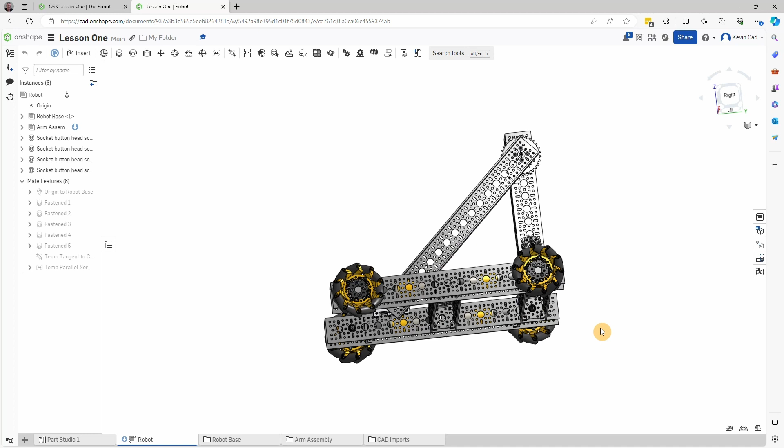Continuing on with our plan to finish off this robot, this video we're going to focus on assembling this arm mechanism. Normally when you're designing something, you've got an idea of where it is you're headed, played with some prototype parts, or have a whiteboard sketch. Here I'm just going to show you what the end result's going to be.

So we're going to build a new assembly, and it'll be separate from the base assembly. That's our plan. You can see we used a 10-hole high post. It's got a motor and it's got some sprockets and things.

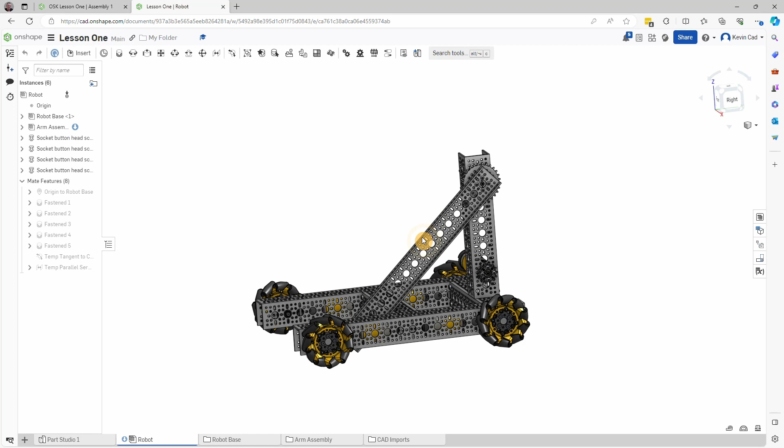So going back to our robot, we're going to start a new assembly. This is going to go way faster because a lot of this stuff you've already done. Our arm, in fact, we can actually look at just the arm assembly here. This is what it's going to look like.

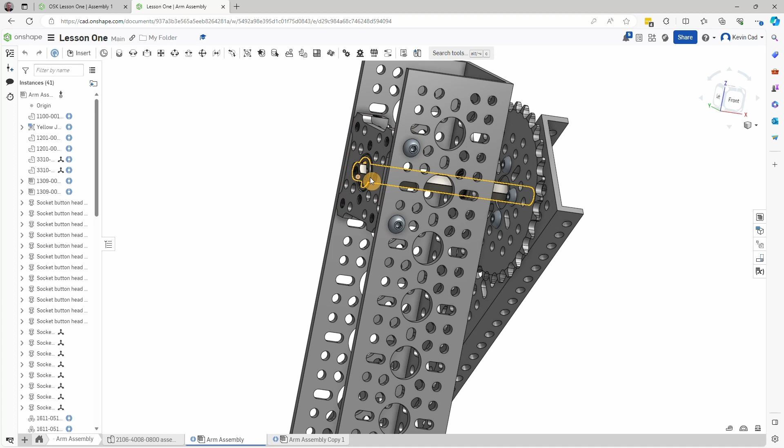We have a deep channel. We have a quad block. There's another quad block up here that's going to help support the end of this shaft here so that we can attach that to the robot arm. We're just going to make note of the fact that that quad block is going to be aligned with this second hole. There's a shaft that we're going to need to import, make the post, and the post consists of a quad block, a 10-hole goBILDA U channel, and another quad block.

Going back over here, we've started our new assembly, and I'm going to right-click, rename it Arm Assembly. We are going to import some parts, so we're going to insert them from our library. We're going to use the 10-hole one here, and we need a couple of quad blocks.

You are going to figure out the rest of that, and I'll leave this up here for a sec so that you can pause on it. A quad block at the bottom, see down there? Put that on, put the screws on. There's a quad block up here, and I'll leave it here while we pause for you to do this, and see if you can figure out how to get that to align like that. Go do that. Hopefully you ended up with something that looks a lot like this.

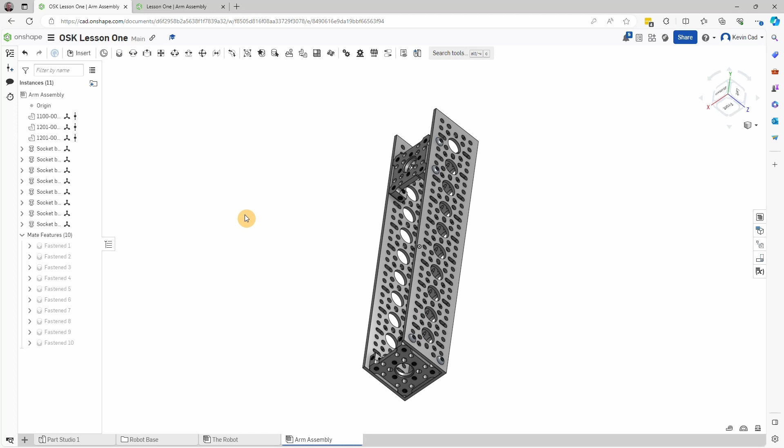Again, this is all stuff that we did in the previous videos. So the next thing that we're going to want to do is, if I look at that arm assembly, let's start with the motor down here. This is going to be very similar to something we've already done, so you're going to figure that out really quick. Couple little changes though.

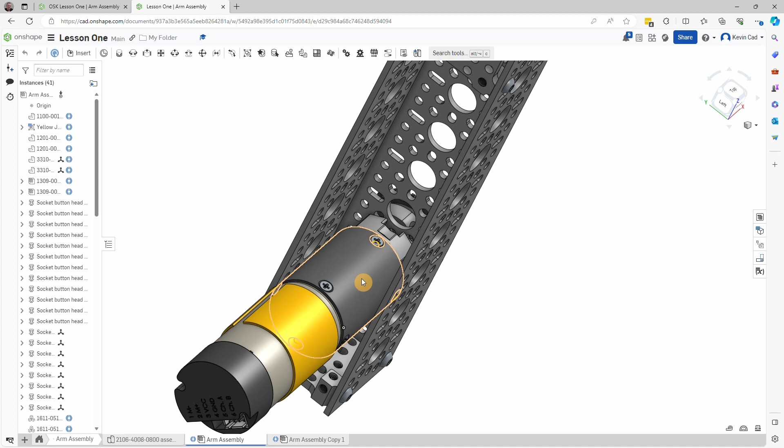This is a different motor than the one that we used before, and I wanted to take this opportunity to show you some models, including our Yellow Jacket model, actually has some configuration options. So we're going to insert from our library an assembly, and we're going to do a Yellow Jacket motor.

Now, before you click on that, take a look at this little spin down here, and you can see it has the ability to select gear ratios. And if I click down on this, there's a list of the gear ratios that goBILDA offers, and I'm actually going to select the 188:1 gear ratio, and that is the motor that I would like to insert.

So I'm going to click on this, and you can see that it's got a much bigger gear head on it. Configuration is adaptable later, so if I hover over my Yellow Jacket instance in the assembly, you can see the configuration options that were used to insert this one. I can right-click it and change configuration is an option here.

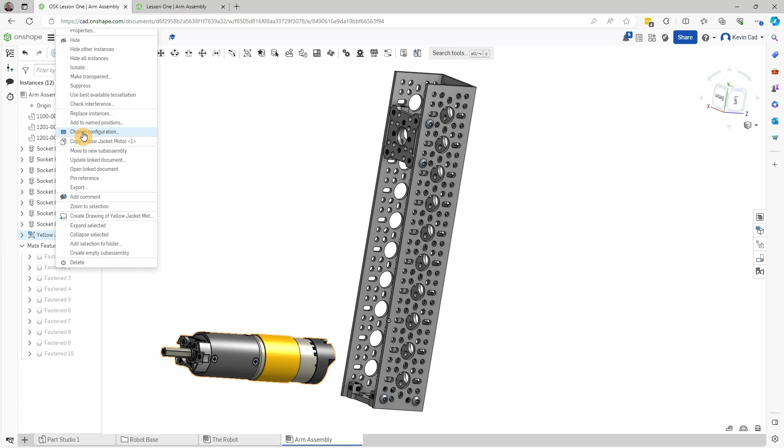And it turns out I can change the gear ratio. Let's take it all the way down to a 3:1. And you can see that the length of the gear head is changing based on the parameters that were set up in all of these things. At a later time I'm going to show you how you can do these as well for your own parts. For now, we'll put this guy back to 188:1 and leave it there.

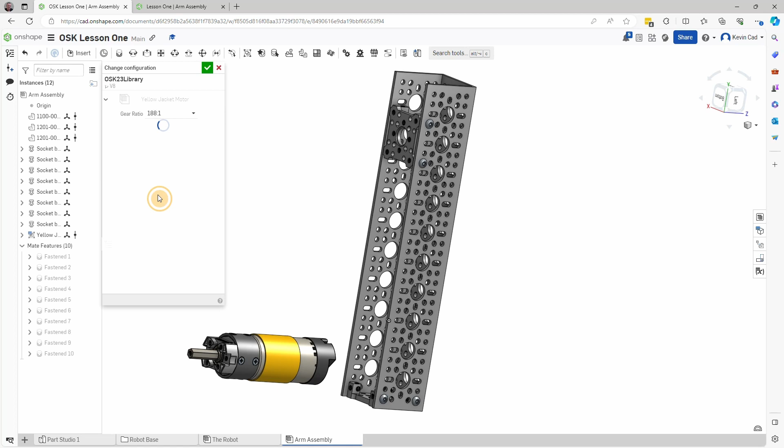You're going to mount this through the second hole here and put screws in. This is very similar to the first motor that we mounted. It's got the little oblong holes here, so you have to put the screws in and such.

You should have something that looks very similar to this. If you're having issues mounting that motor, it's almost the exact same steps that we used at the beginning of video number 2, where we mounted the motor to the quad block.

We now would like to add to that this sprocket assembly, which consists of a hub assembly that is in our library, and a sprocket, which is also in our library. Let's do a sub-assembly of this: insert new tab, create assembly. So we end up with assembly 1 here. I'm going to right click that and rename it to mounted sprocket.

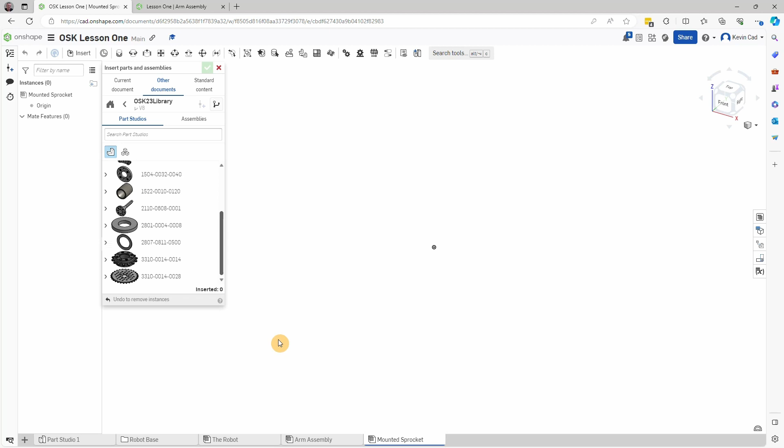From our OSK23 library, the sprocket, which is down near the bottom, there are 2 sprockets down there. Get the 3310-0014, the one that looks like that. And from assemblies, grab the hub up here on the top, the 1309, and we'll plop that down right there.

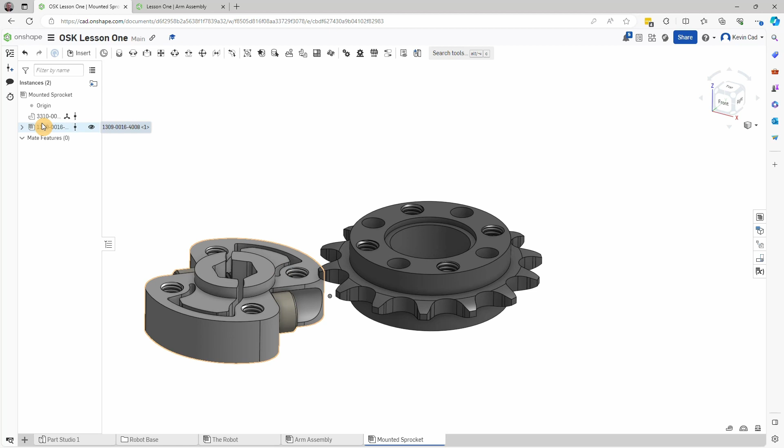As always, I take the first part that I inserted into an assembly, right click it, and fix it in place so that things move relative to it. Notice that the sprocket has through holes. Those are 4mm holes, and a 4mm screw will go right through it, and it has threads for a screw into that hole. Ideally, we would like to align these threaded holes up with a non-threaded hole on the other part.

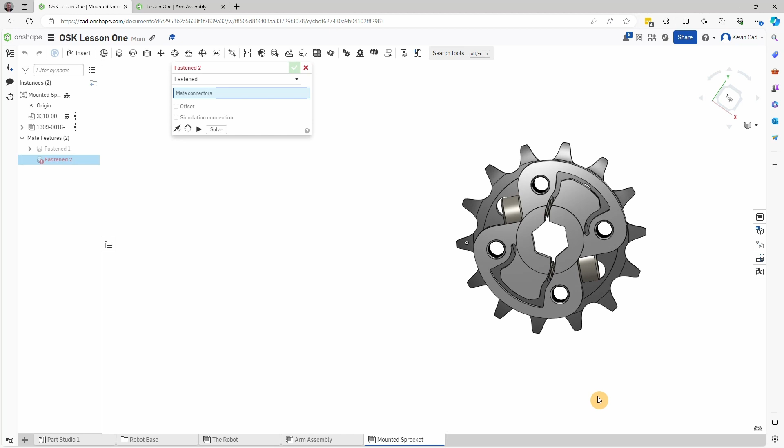My first inclination is to just try using a fastened mate between this part, clicking on this outside edge out here. I was able to use the geometry of the part to get the center there, and I can click on this and those should fasten themselves. It looks like everything lined up pretty good, except it turns out that the threaded holes, if I zoom in, you can see the threaded holes lined up and that isn't really what I wanted to do. There are a few things I could do to fix that.

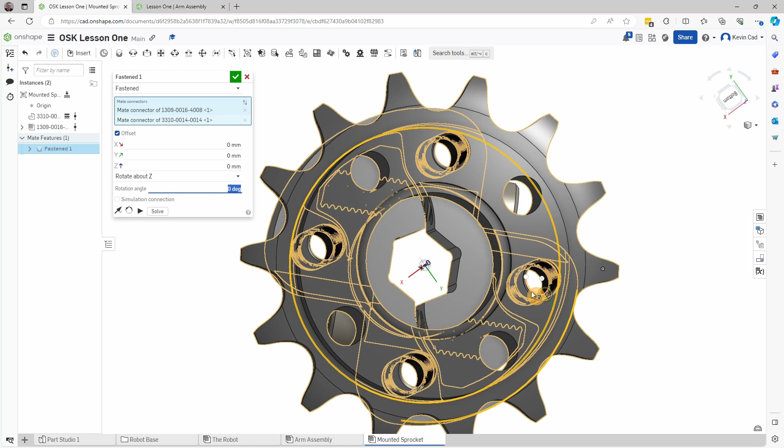One thing I could do is edit this and do an offset, rotating this fastened mate by some number of degrees around the z-axis. So I hit offset, click on rotate about z, and I need to enter the number of degrees. I kind of want to move 1/8 of a turn, so it turns out I need to rotate this thing about 45 degrees. Let me try that, 45 degrees. Okay, I've rotated that about 45 degrees, and now that hole pretty much aligns. Now I've got the proper alignment that I was looking for.

My goal in doing that was to show you that if you click this offset, you can do various things. You can rotate about various axes, one axis at a time. You can offset from the mate connector along the z-axis, or offset along the y-axis or the x-axis. So we just did a rotate there.

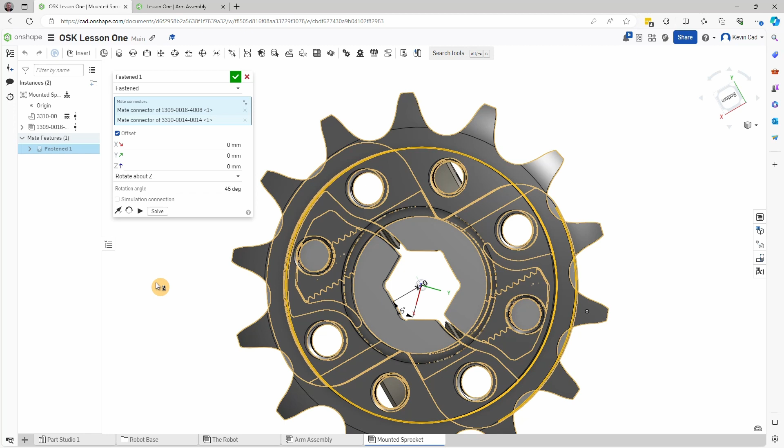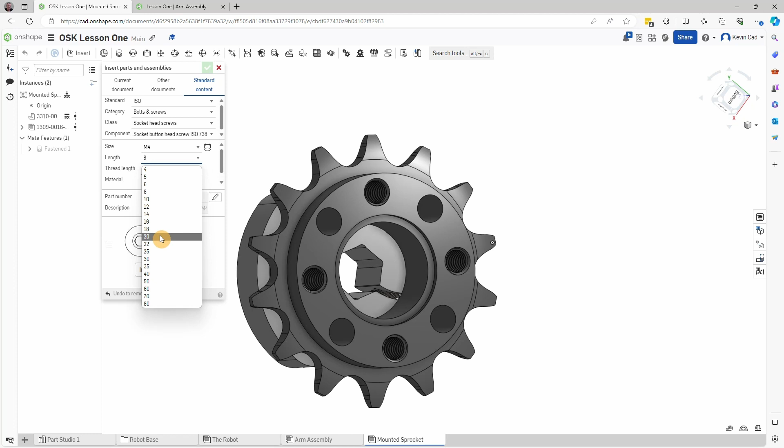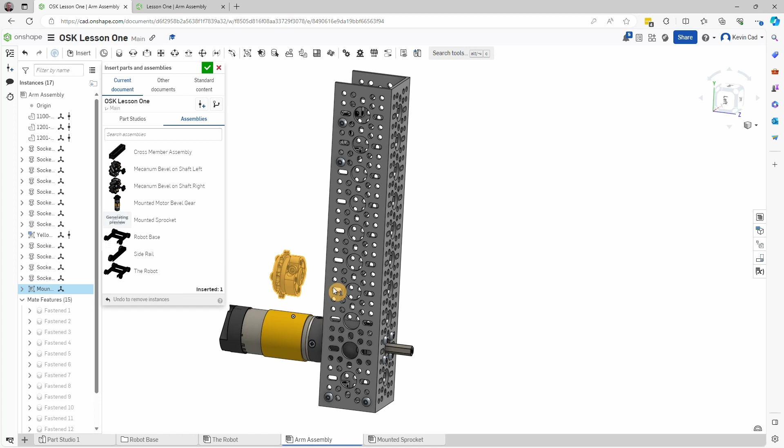I'm going to hide all my mate connectors, take a pause and go do that. So we now have that little gem, and we can go back to our Arm assembly, and insert from our current document a new assembly called mounted sprocket, and we'll throw that in here.

We'd like to mount it to this shaft here. I'd like the sprocket to be on this other side. I'm going to show you one more cool thing that you can do. This is one of those planned tangents.

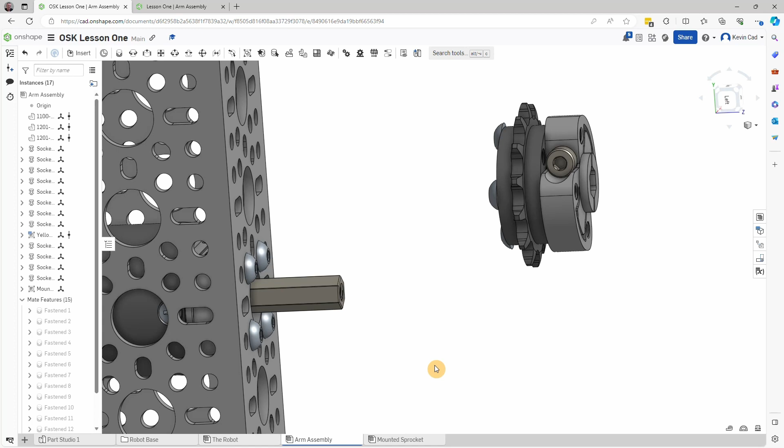If I click on this part, see this fancy handle that showed up here? This is for manipulating the orientation of a part or an assembly, and it has lots of things you can grab hold of.

These little squares here, if I grab one, I can drag the part around. This one with the arc on it allows me to rotate a part. I can grab that and rotate around one of the axes. I'm going to put that back to 0 so it's like nothing happened there.

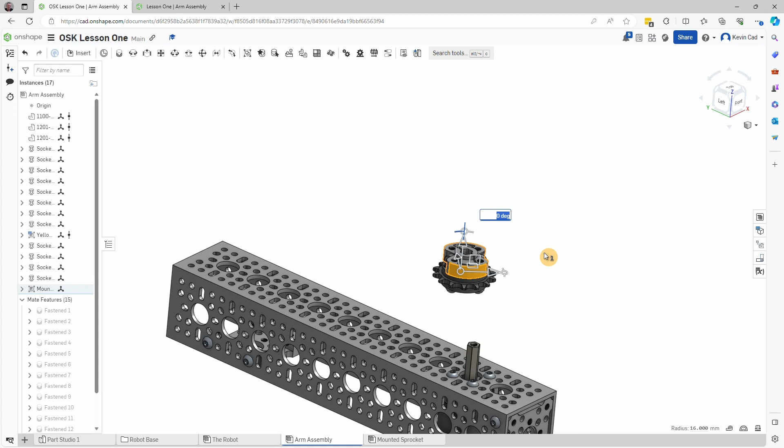I'm going to click on the left face. Now you can see if I rotate this around, what I really want to do is rotate it so it orients properly. Okay, I did it 180 degrees. There we go.

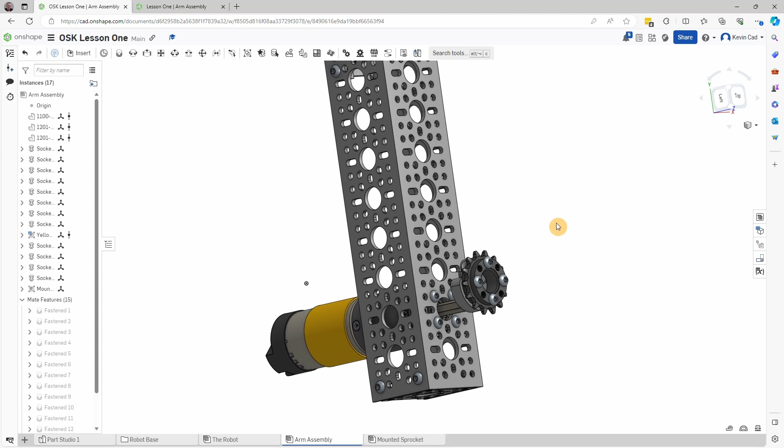So I would now like to somehow get this guy to mount on there, and I kind of want to mount it in that orientation. I also want it to rotate, so I could do a revolute mate. I'm going to slide this out of the way to the end of the shaft, so I got the mate connector at the end of the shaft and this. Okay, there we go.

Is this exactly what I want? No. Why? Well, remember the screws? We're going to conflict with the screws down here. It's really close to conflicting with them. I'm going to say that we're going to hit those screws. So let's think about this a little bit.

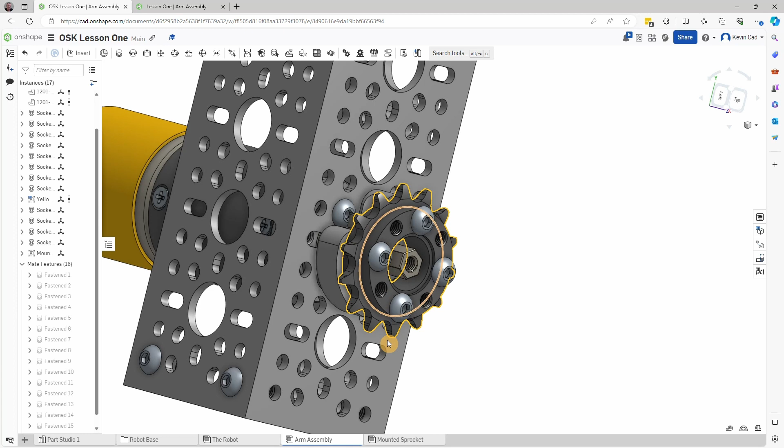Well, this part actually clamps onto this shaft, so that means it'll rotate, but I could also slide this thing right and left. And if you'll remember in our mating discussions before, a revolute will only rotate around the z-axis.

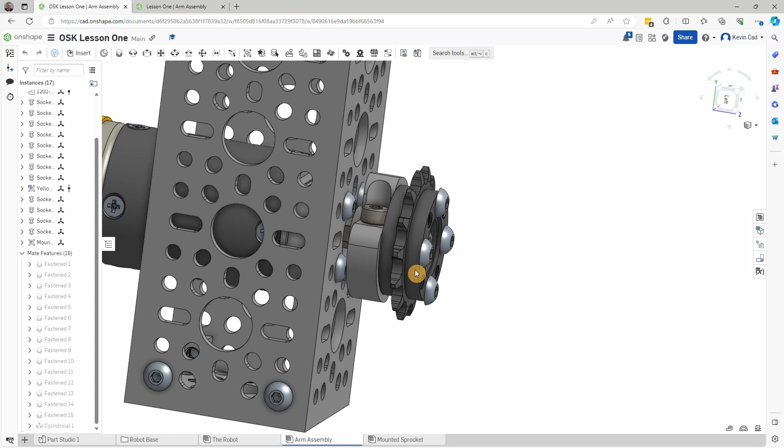There was another one called a cylindrical. There it is. That cylindrical mate, if I change it to a cylindrical, it'll rotate, but we can also slide it. Okay, so that's what I'm going to do for right now. I acknowledge that this part is a little bit loose at the moment, and we'll end up fixing it in a different way a little bit later. Okay, so there we go.

First step is let's go insert the bearings. So I'm going to go to other documents. There's our OSK library. These are composite parts, and the bearings are composite parts. So I'm going to click here and we're going to scroll down.

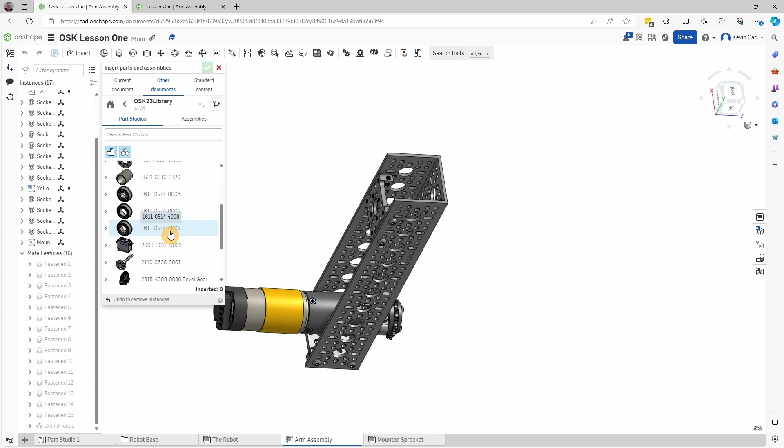Now, if you'll remember before, we used the first two bearings here and they end in 3 zeros and a 6, and those are smooth bore. It turns out there's another one here. It has a hex - this is a hex bore and it has a 4008 at the end. So we need 2 of those. Pop one of those there. Pop one of those over there.

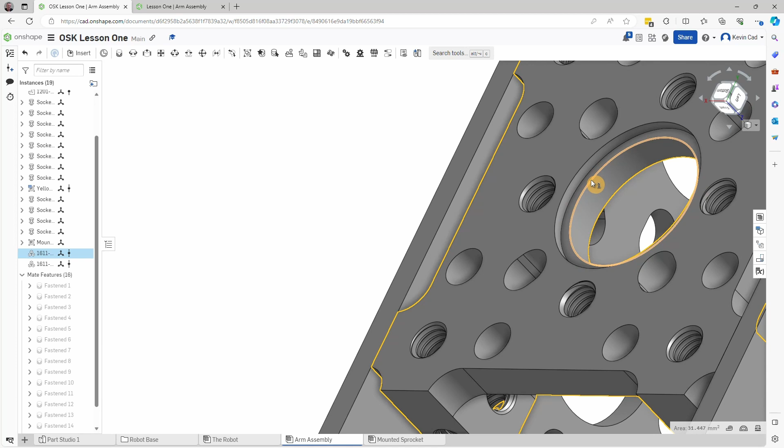Okay, that's pretty straightforward. If you remember, when we use flanged bushings, we like to mate to that surface right there, and you're going to mate that to this surface here because that bearing is actually going to fit just barely inside this hole, so you want to fasten mate that to here. And you're going to do the same thing on the other side - take that other bearing and fasten mate the flange to here. Go ahead and go do that now.

You should have ended up with a bearing that has fit into that 14 millimeter hole. It was the second hole down, by the way. And across this side, you have another bearing that actually sort of fit into this countersink here, and it should look like that. All right, so now we would like to go find ourselves a shaft. We know that from here to here is 48 millimeters because we've measured that before.

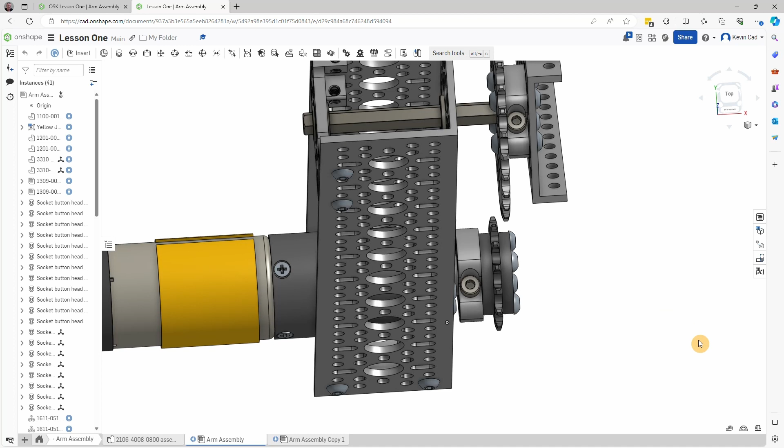If I didn't know that and couldn't remember it, I could click on that line and it'll tell me it's 48 millimeters. Okay, that makes sense. I don't remember how long this part is, so I can also measure from this plane out to this plane. It tells me it's 28 millimeters. That's rational, so 28 plus 48 is 76 millimeters.

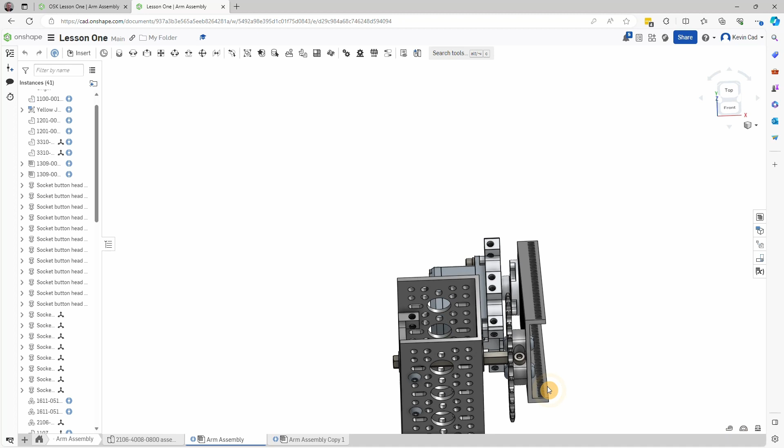There's a little bit more sticking out over here, so I think this is actually an 80 millimeter shaft. We don't have one of those, by the way. If you go look in the library, it isn't there. And that's because you and I are about to import our first part.

We are going to go to the manufacturer's website and find ourselves a STEP file. Let's go figure this all out right now. A new tab in my browser, we're going to go to goBILDA.

So here's goBILDA, and it turns out AndyMark, REV, all of the First Robotics folks are pretty good about putting out CAD files. We need to find a shaft, and I can search for it. I think it's called a REX shaft, aluminum REX shafting.

Actually, I'm going to go use one of these that has the little clip on it, just because it'll make our life a little bit easier, okay? And so they have a whole bunch of them here, so we need to pick one.

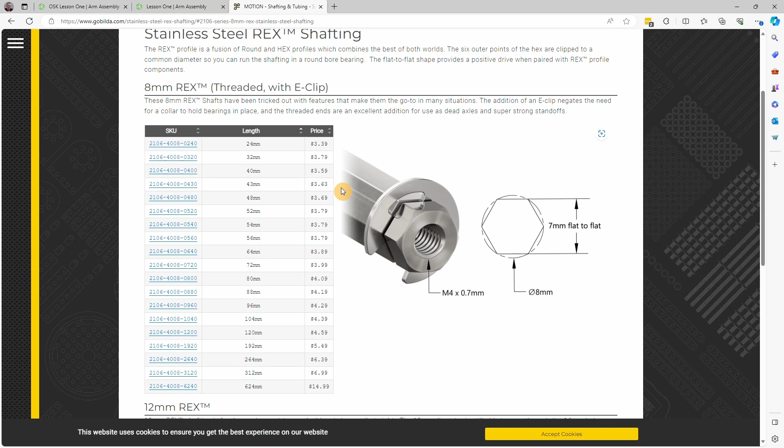We think we wanted an 80 millimeter one. Here it is. If I click on that, there's an 80 millimeter one, and it'll show you a little diagram of what everything looks like. See how they used a cross section.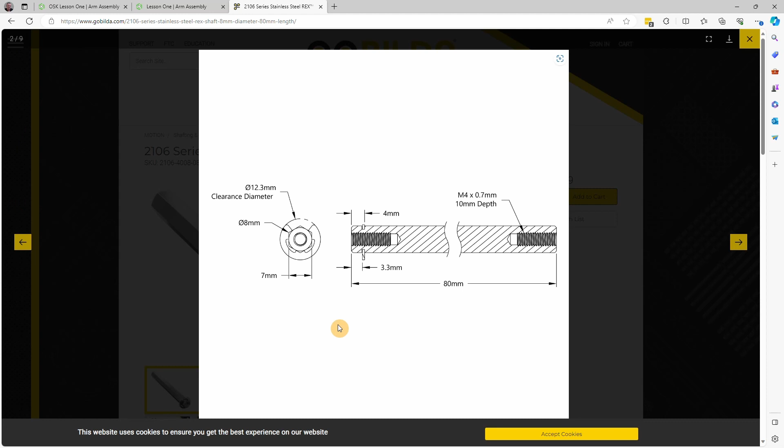Remember, we had cross sections in the view cube. So there's a cross section of the part, showing you the thread depths and such. It's also showing you that there is an E-clip out here on the end.

Okay, so this is actually an assembly. If I look down here, I can find a thing to download. It's called a step file, and step files are sort of the standard language of CAD programs. All CAD programs can import step files. It's the lowest common denominator file, but it's the standard, and a lot of people end up using these.

Okay, so I'm going to click on the step file, and it's downloaded it. See it here? So I'm going to open that file. It's a zip file, I need to extract this file from the zip file. goBILDA tends to send you zip files, and they need to be extracted.

So in Windows, I can just hit extract all. It's asking me where to put it. I'm going to close the zip file now. Here is that thing, it's called a step file. I'm going to move this out of the way for now.

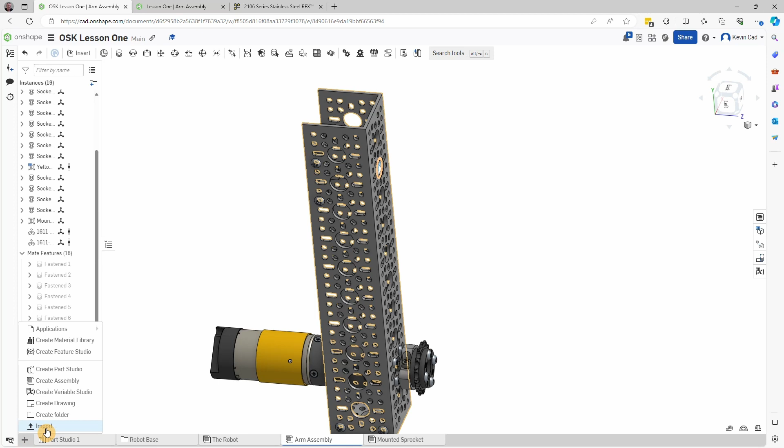We're going to go back to, so I now have a file sitting on my computer that I downloaded, and I would now like to import that into my document here. So I'm going to come over here, hit Insert New Tab, and I can import a file.

For me, everything always ends up in my downloads directory. So if you go to your downloads directory, look for the newest thing that you downloaded, and it's going to be not the zip file, but the extracted file and this assembly file. Okay, so some options are going to appear here, and we need to talk about those.

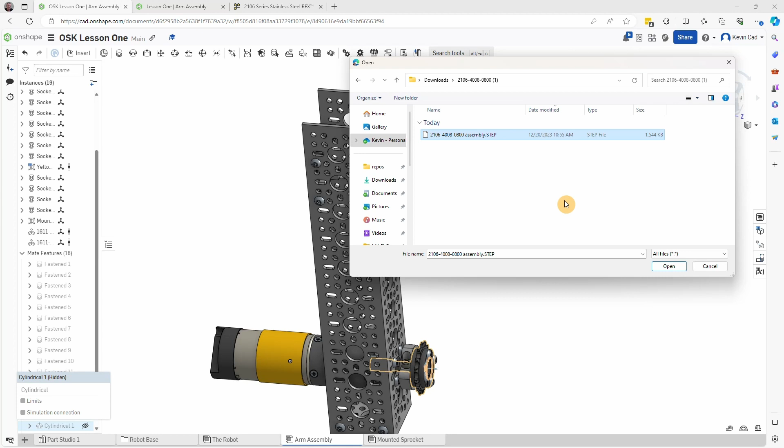So I'm going to upload that. Now this dialog is asking me, do I want to import this document or combine into a single part studio and use this with small assemblies? Unless you know for a fact that you want to import a full assembly, I would pretty much always choose combine into a single part.

We know that this has two parts in it. I'm actually going to create a composite out of it, so I'm going to create composite part when importing multiple or non-solid bodies. If you're not sure, you can actually change this later.

Okay, so we're going to do an import of that. What's happening is it's uploading from my computer to Onshape, and it's going to import it, and then it's going to translate it into a part studio.

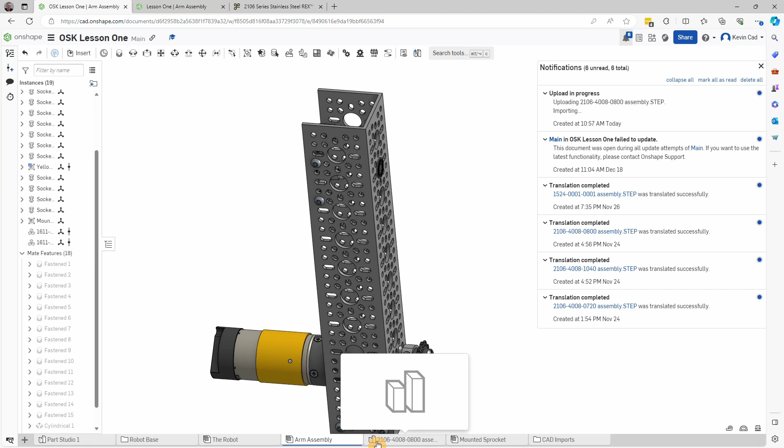There it is. So you can see it's imported this thing as a part studio, and it translated successfully. So that's good. I'm going to close this little window, and we can go look at this thing. So that's how I import parts using step files.

You can import step files from almost any source. We'll be doing a lot of that later, but I just wanted to show you that's how you grab one. Quick tour: the parts are listed over here in a part studio. This is not an assembly. See, all of this is different.

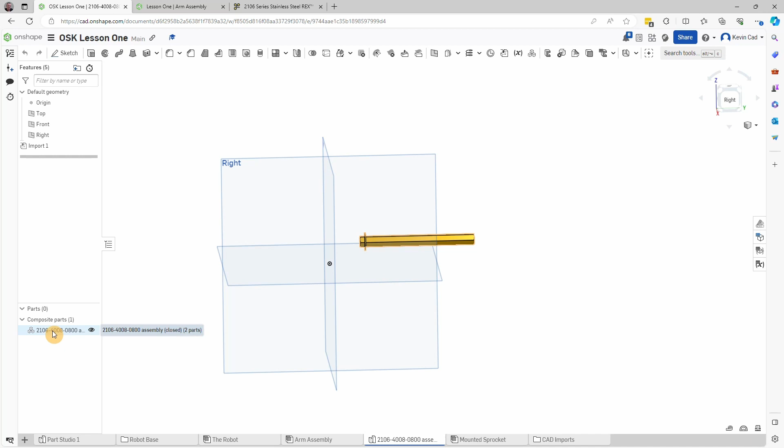We are going to change a few things though. See where it says composite parts? That's where I imported a composite part. I'm highlighting it there. I can right click it and assign a material to it, and it turns out that this is made out of stainless steel.

So material, Onshape material library is usually the one that you would normally use. In the search by material, you can start typing in stainless, and 300 series stainless steel is probably about right. This will assign its material so that it knows its mass, how heavy it is, and so forth. Okay, I'm going to hit the green check mark there.

Now the other thing I can do is right click it and edit its appearance, because right now it's a funny yellow color. For stainless steel, I usually use a slightly yellowish color of steel, so maybe this one here. Yeah, that looks good.

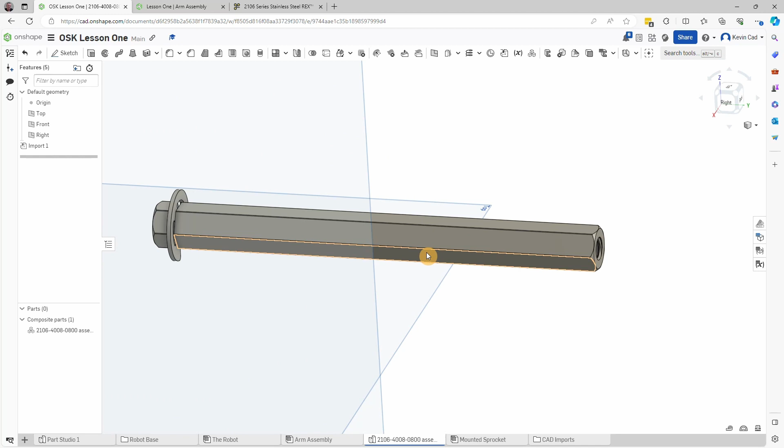It'll help you distinguish it from aluminum. So now if I scroll in on this thing and rotate around with standard mouse controls, it kind of looks like a stainless steel part. So there we go, we just inserted a part that we didn't have before. You can see it's in the part studio. It also created this CAD imports entry, and this is actually the step file itself. You can generally ignore the CAD imports directory, just leave it alone. The program needs that file to recreate this thing.

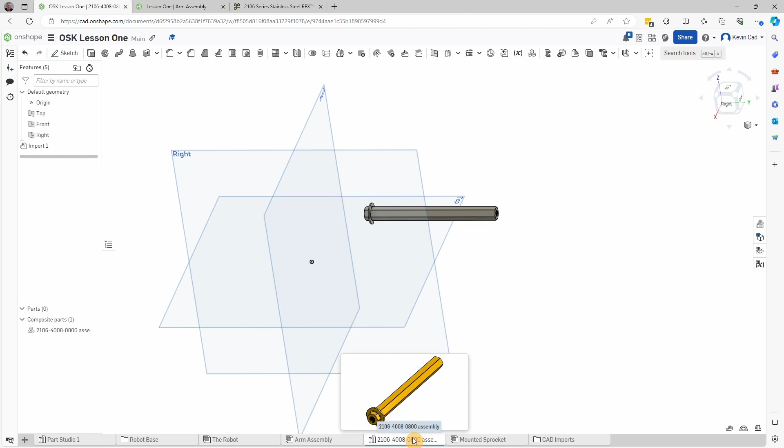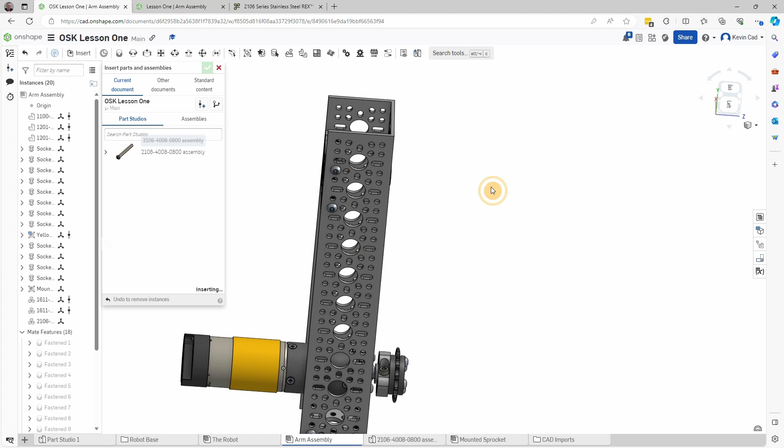Now we're going back to our Arm assembly, and we can insert from current document. Look, we now have a part studio. The fact that there are two entries for this is a little more complicated, we'll talk about that later. I'm going to spin that up. We can insert that, ended up with that shaft. We're good to go.

What did we just do? We just went out, found a part that we needed, imported it, and brought it into our file here. Life's good. We would actually like to put that in the model here. Now remember that this is fixed, that bearing there is fixed. This thing, we're going to want it to be able to rotate.

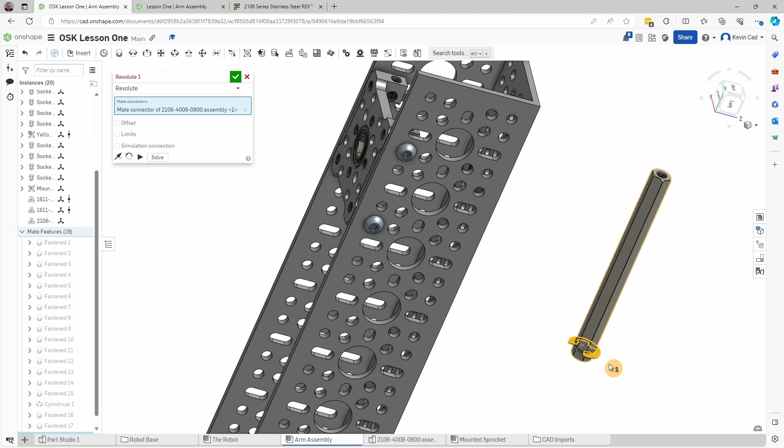So I'm going to put in a revolute mate. As I scroll in on this, I actually want the surface of the E-clip, and I'm going to click there, so I've grabbed the center of that surface. And we're going to want that to ride on the surface of this bearing here, and I'm going to select that. So there we go, and if I hit the green check mark, I should now have that shaft running through that bearing.

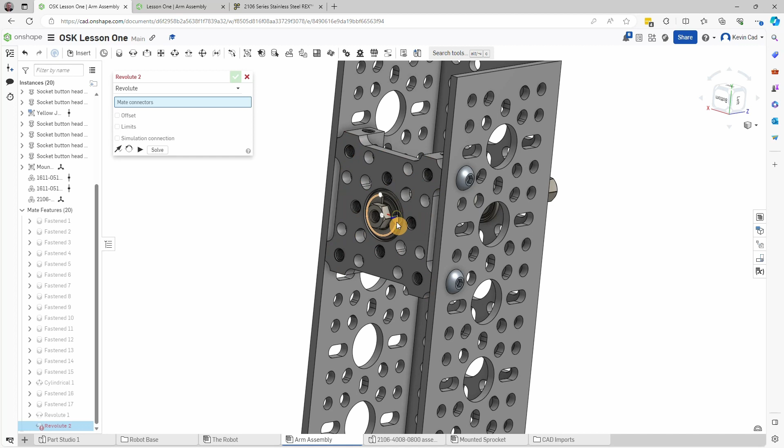I'm going to right click this and fix the main post there, because we're going to start dragging stuff around. But you can see this shaft can spin. We want that shaft to spin. That was a lot of steps. You got it. If you need to, you can come rewind, go do that right now.

Okay, welcome back. So, hey, let's take a look at where we are right now. We have that shaft inserted there, and now we want to add a sprocket assembly for the top. Let's have a look at that real quick. There's a sprocket assembly up here, it's got one of those hubs and a sprocket and 4 screws. Let's ignore the arm part of it just for now, because we'll deal with that later.

So, hey, let's do another assembly. I'm going to go back over here. Let's start a new assembly.

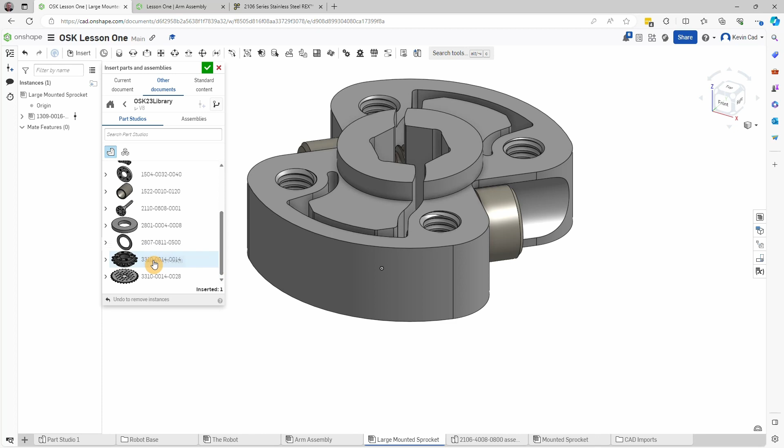Right-click, rename, large mounted sprocket. Insert from assemblies, we want one of those. And then from the part studio, there's a large sprocket all the way down at the bottom. So we want the 28 tooth sprocket.

We'll pop that right there. We should be able to just do a fastened mate. Pick that. Okay, that looks good. We should be happy there. Go add 10 millimeter screws, 1, 2, 3, 4. You know how to do that. Go do that and I'll wait for you.

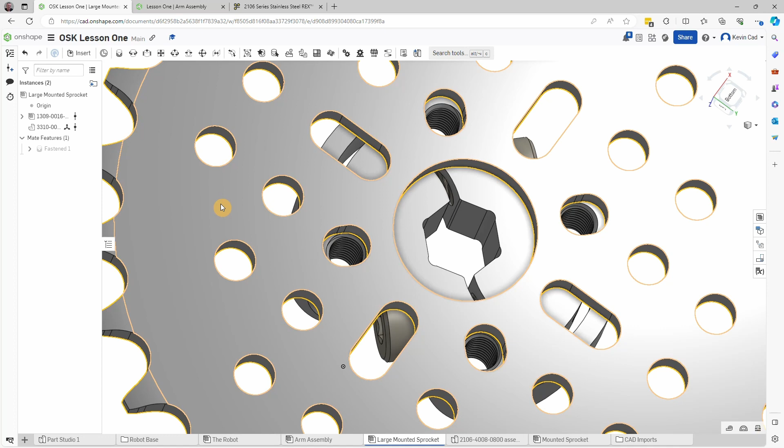Hopefully you've got something that looks a lot like this. Let's go back to our arm assembly and let's insert that. So insert current document, assemblies, large mounted sprocket. There it is. Okay, now much like the previous sprocket down here, we need to mount it to this shaft.

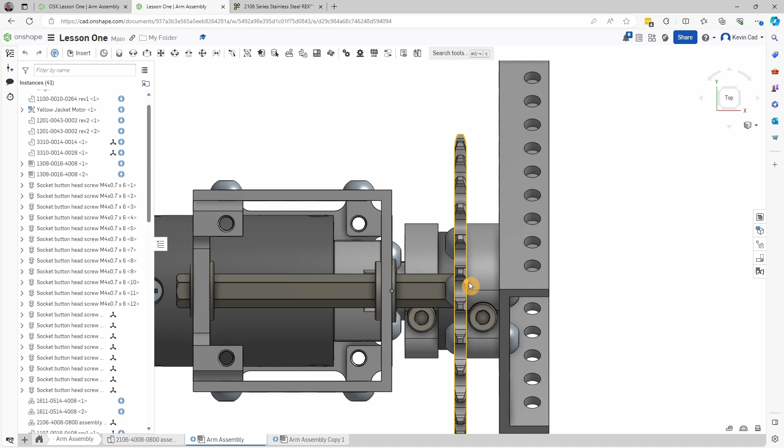Now, one of the things I had to think through is where's the chain going to go? Chain has a thickness to it. Specifically, I need some space on both sides for the chain. So that tells me that the hub is actually going to be on the outside this time, where it was on the inside last time. We're going to make sure that we're doing that, all right?

So let's go back over here. So it is going to sit oriented just like that. And I believe I would like to do another cylindrical mate. Oh, no, I don't want a cylindrical mate, do I? I don't want this to rotate. Let's think about that for a sec.

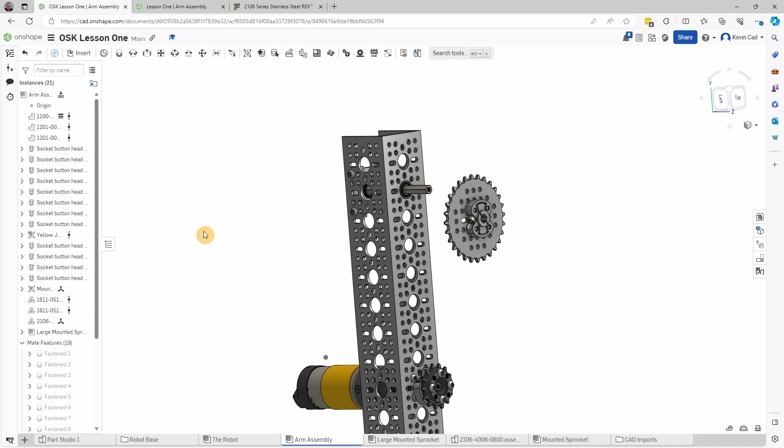Actually, I want it to be able to slide back and forth on this, but I want this to be fixed to the shaft, okay? We want that attached to the shaft. So rather than a cylindrical mate, I think I'm actually going to use a slider mate, okay? I was just thinking about the degrees of freedom I want. I don't want this thing to rotate on the shaft, but I want it to be able to slide on the shaft. So let's try that.

I'm going to click on there, and we're going to go click on there. Okay, that looks about right. And so now, when I turn this, you can see it rotating there. That's what I wanted. All right.

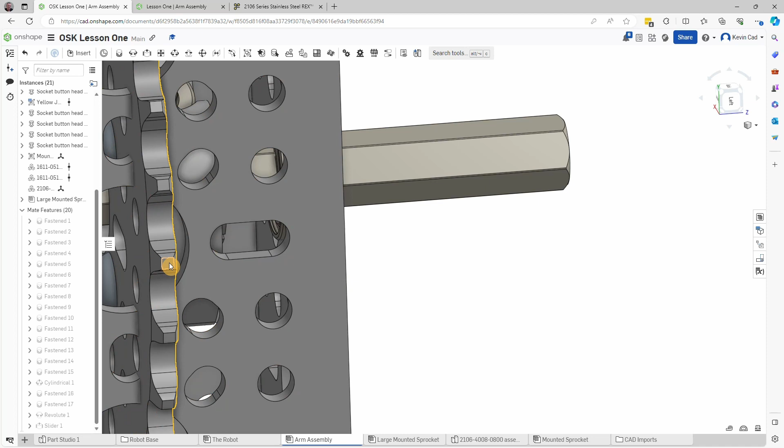Okay, so this slides, right? But it also will rotate with the shaft, which is exactly what we want. All right, very good. So the next thing we need to add is an arm, and the arm is going to attach to this.

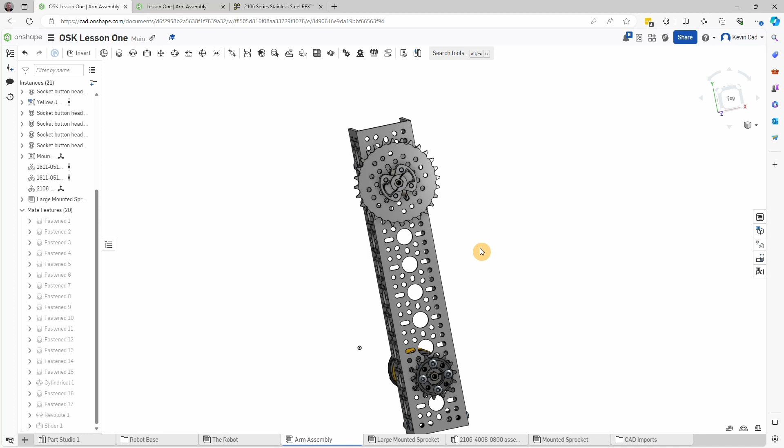So let's go insert an arm. Insert, current document... no, we want to go to our library again. And this time we're going to use an 1121 part. It's a long, skinny fellow. Looks like that, okay. It's a U channel, but it's kind of skinny.

And I'd like to attach to this hole right here. Okay, and I would like that to attach here. I don't want it to revolve in relation to this. It's going to be fixed. So we're going to do a fixed fasten mate between this and this. Did that make sense?

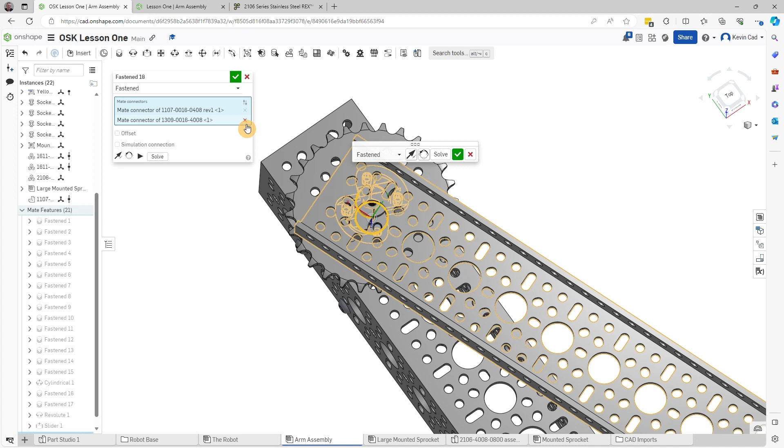And apparently I did not do the right thing on that second connection. Let's try that again. I need it to be this. There it is. All right.

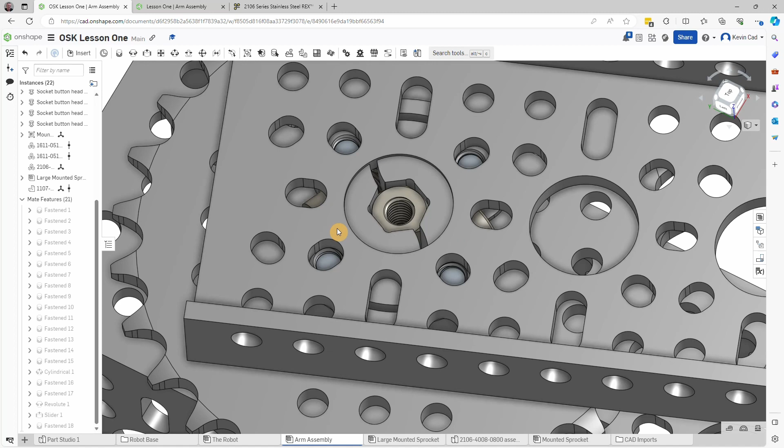So now I need to fasten it. Oh, so there's an issue. Yeah, you know, when you're assembling stuff, you sometimes run into things. Check this out, those screws—those screws, I can't use those screw holes. Well, that's a hassle. You know, this is actually pretty thick over here.

I think we used 10mm screws there. I could use a shorter screw. If I change this to a 6mm, I can measure the distance from here to here is 13mm. Okay, so if I change these to 6mm and then put 6mm in from the other side, that'll be plenty to hold it, and I can use the same screw holes.

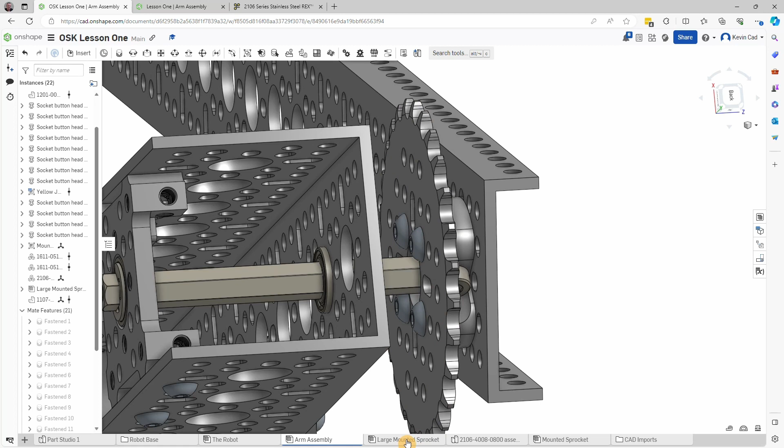Okay, so how am I going to change those? Well, turns out if I come back up here—I think the last 4 button head screws—oh no, those button head screws are something else. I need to go back to my assembly, to that large sprocket assembly here, and take these screws, and I need to change their length.

And it turns out that these are configured parts. So if I right click over here, I can edit standard content instance—see that little thing there? It allows me to change some parts of the screws. So, for example, I can now change these to be 6mm screws. All right.

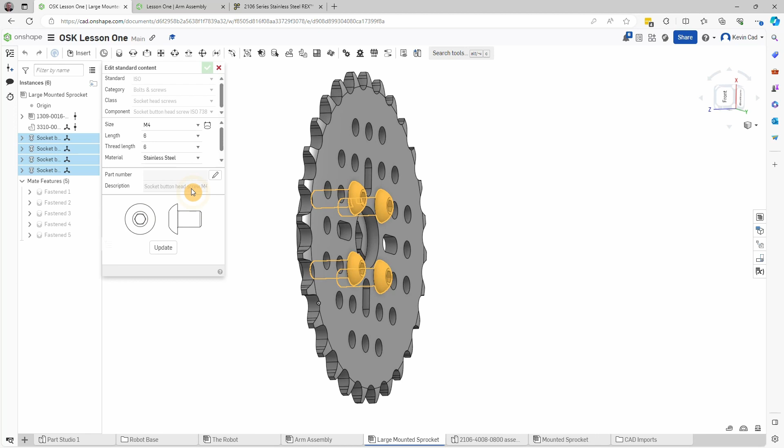And if I do an update, you can see that the screws no longer go all the way through. So now if I go back to that arm assembly and look, I can see the end of the 6mm screw is in there. My purpose of showing you that was, hey, you can actually go edit things like the length of a screw.

As things pop up, go do that now. You should have something that looks like that. You've got a couple of screws going in there, and a couple of side tangents here real quick. If I click on this part, I know I've got these 2 screws going in there.

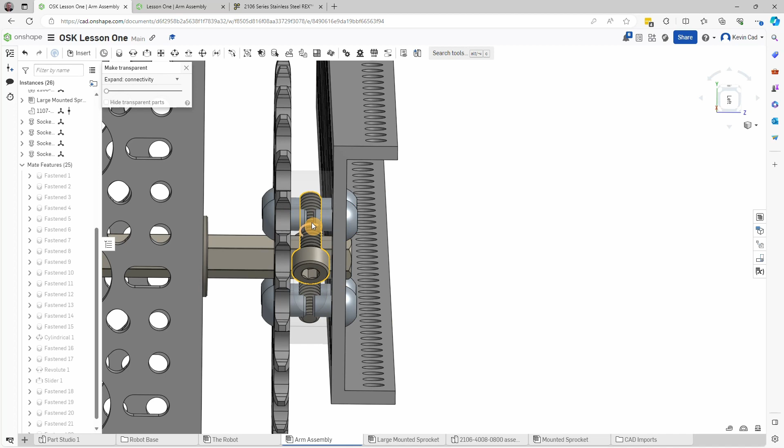If you remember, we can make this thing transparent. And now you can actually look in there. You can see, okay, the screws are not hitting, right? You can see the other screws. Those screws are in the clamp, but you can see that our 2 6mm screws have about a millimeter gap there. So that's pretty cool.

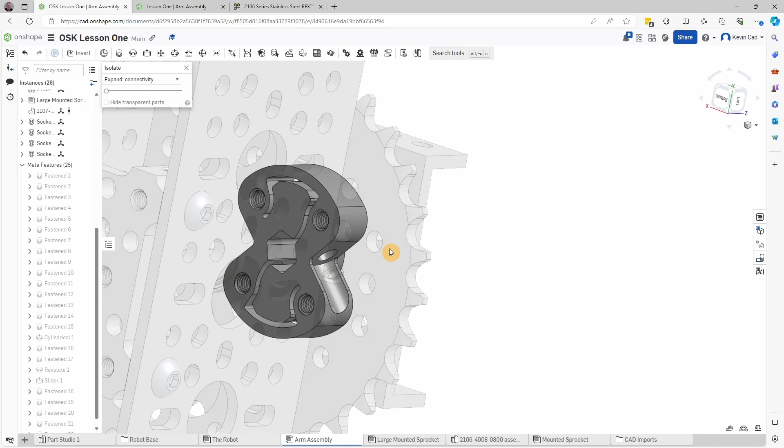Another thing I just wanted to show you, so that was the make transparent. You can also right click and isolate. If I wanted to look at just the hub, that isolates just the hub. So if you need to go in and take a peek at just a specific part, there you go.

Let's talk about sprockets here for a sec. Chain and sprockets, the sprockets need to be on the same plane. This is an opportunity for us to use a planar mate. So in just a second, you are going to do the following things.

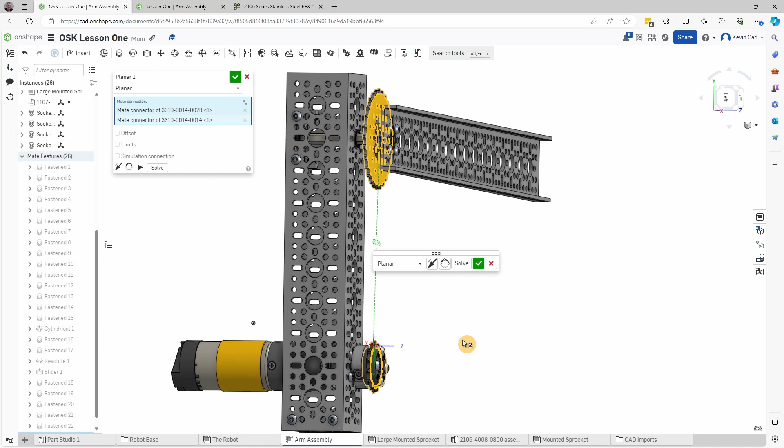You are going to click on planar mate, and you're going to click on the outside of that sprocket. Highlight like that. Come down here, and I'm going to click on this sprocket. Now, don't be alarmed that that moved, it's just showing you that those are now planar. And because when you hit solve, it'll resolve the assembly and put everything back. But it's telling you that those are now on a plane. Awesome sauce, so you can hit a green check mark on that.

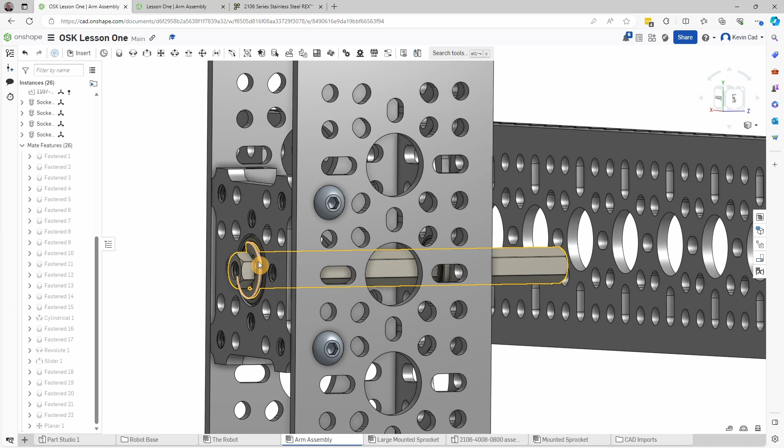What did that do for us? I'm going to close the planar mate there. These are now always on the same plane, so if I move these, the other one will move with it. And I'm going to move these out of the way for a sec. When you look at the spring clip over here, this is prevented from going to the right, okay? But it can go to the left because the spring clip is not actually an attachment.

So that means that I could, if this was in reality, come push on this end and slide that thing right out. I'm pointing that out because when we go and attach this and we clamp this hub to that, nothing will prevent this thing from moving in. It won't be able to, it'll only be able to travel to the left so far because of this clip over here, but nothing is preventing this shaft from pushing all the way over to the left there.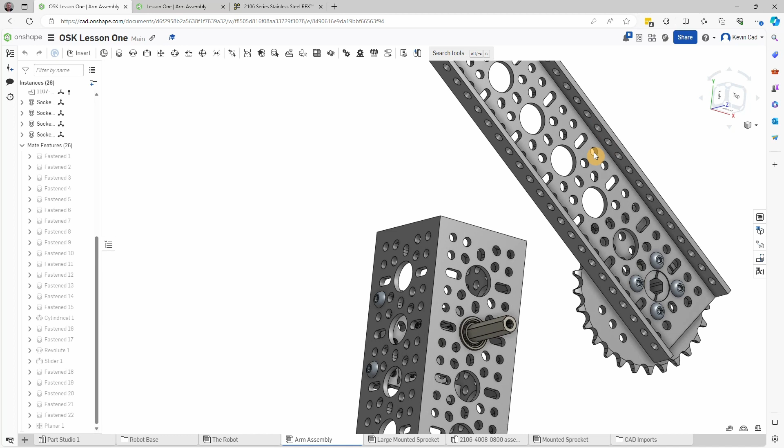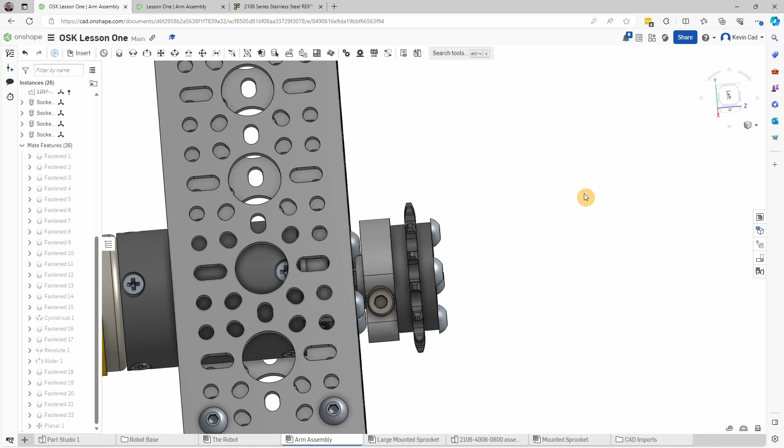All right, so we're going to need to put in a spacer on that side. We can actually make a 3D printed spacer, which is going to allow us to do some stuff in a part studio. That is going to be a project that we're going to come up with here in just a minute. I am, however, going to bring this over. When I look down here, I'd like the hub to be close, but not touching those screws there. So that's probably a good spot for it, right about there. I'm actually going to just leave that there for a sec. We are going to patch that up when we get to doing part studios in the next video.

On the end of this arm, remember we put a slider mate on this? I'm actually going to make this into a fastened mate just for now. All right, so that's a fastened mate so that this thing will stay put so we can manipulate it. Notice that the planar mate still works down here, but now since this is fastened up here, this no longer moves. That's what I did, is I just changed this slider mate so that this thing no longer moves. In reality, you have to watch out for that because, again, we need to put a spacer between there and there. So go do that right now.

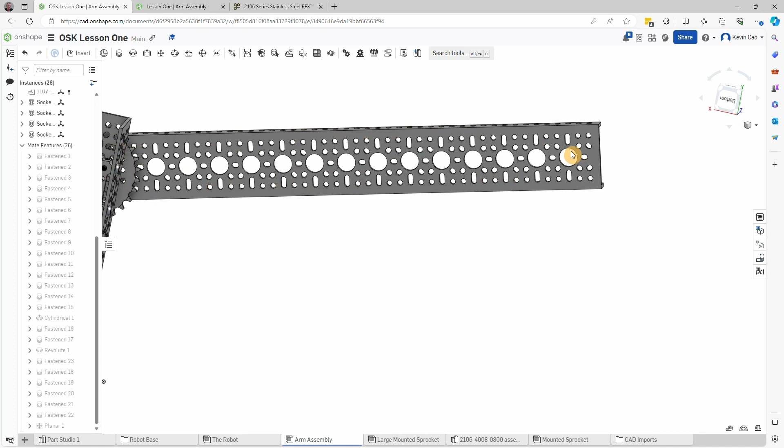We're now going to throw a motor on the end of this thing.

We will eventually attach a gripper to this. Back to this side: insert, standard content, other documents, assemblies, and one of these is a mounted servo motor.

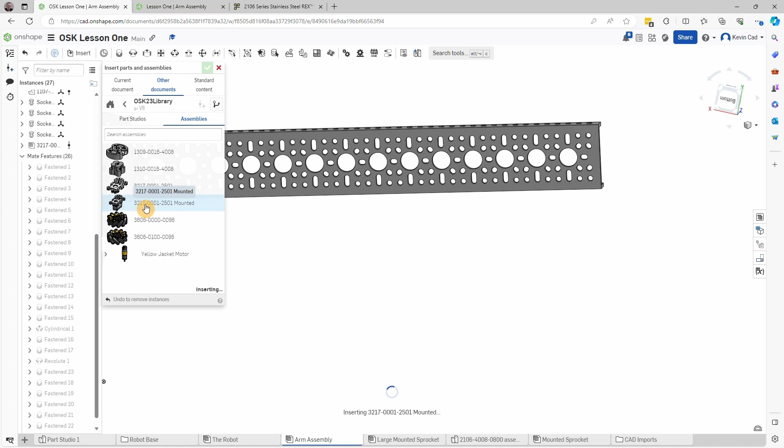Won't get into it too much, but servo motors are very cool. They're very compact and usually pretty strong. You can put them in two modes: one allows them to continuously rotate, the other allows it to move to a specific position. They're kind of a staple of the robotics world.

We're going to attach it here. This face is going to get screwed on here, so it's going to be a fastened mate between the inside of that—see, I grabbed the inside instead of the outside—and the center of this.

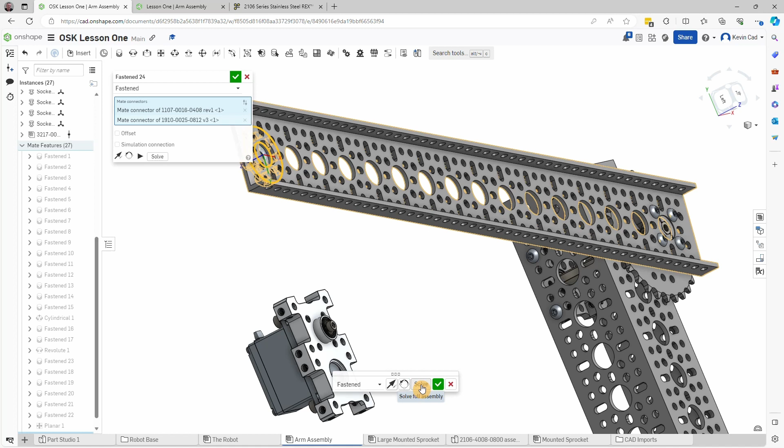Okay, and it moved—that's all right. We know if we hit the solve button it'll go up there, and I'll hit the green check mark, and there it is. So here's what I want you to do.

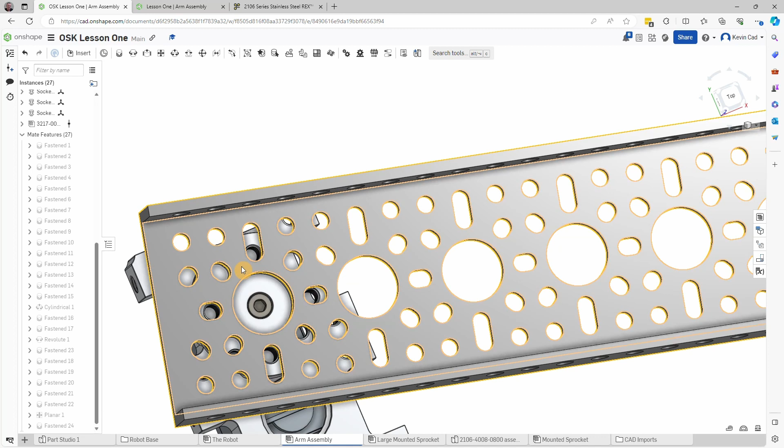I want you to go measure how long the screw needs to be. It needs to be from here to there—you know how to do that. And then insert screws 1, 2, 3, and 4. Go do that and come back.

All right, so you should have ended up with something that looks a lot like this—an arm that has a servo motor on the end of it that we'll be able to attach some things to. One last thing we want to do, or can do, is establish a gear relationship between this gear and this gear.

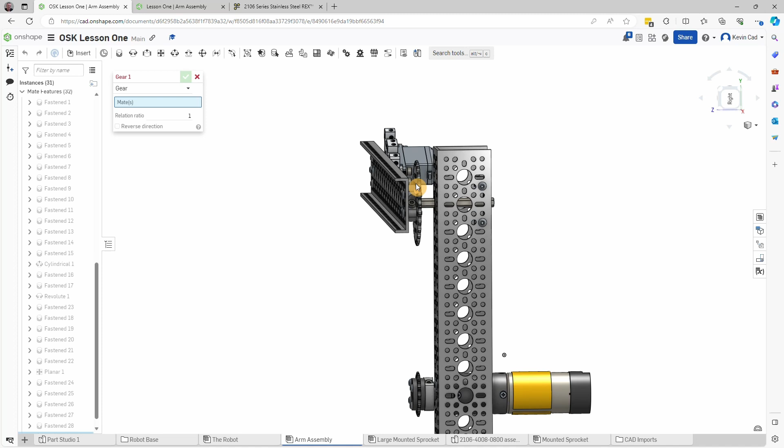Okay, so how are we going to do that? Well, it turns out that if we do a gear relation, we would like to use a revolute mate. We don't have any revolute mates here, but we do have one over here. So let's go find—I believe it's that revolute mate there.

And then it turns out there's another revolute mate down here that attaches this guy, but it's actually a cylindrical mate—it's this one here. So we should be able to do a cylindrical mate.

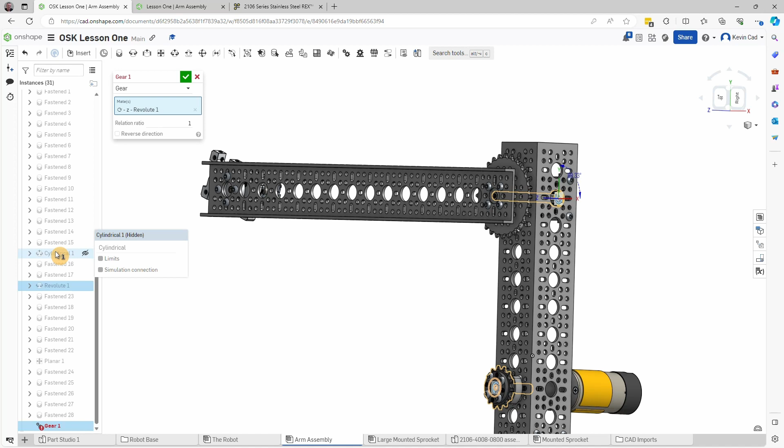Cool. It turns out this is a 14 tooth, and this is a 28 tooth, so the gear relationship should be a 2-to-1. Okay, and so that means—let's see, that means what?

For every turn of this one, okay, here we go, let's do this. So now, as I turn this guy, the bottom one should be going faster than the top one. Let's try it. So if I turn this guy by a quarter, see how the top one is slower than the bottom one? It takes a half turn here, results in a quarter turn up above, and that's what we wanted.

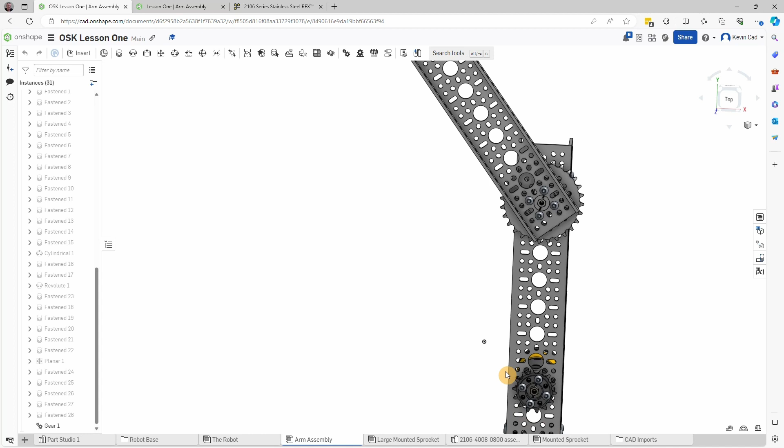So I know that there's supposed to be a chain in there. Chain's complicated, not a beginner topic, so we'll deal with that later. All right, this arm is now ready to go. So go do that—hopefully that's working.

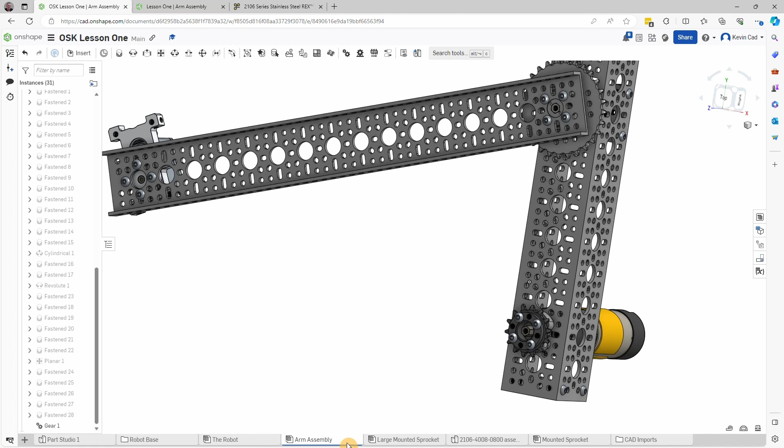We're now going to mount the arm to the robot. So we have this arm assembly, here's the robot. I would now like to insert from the current document the arm assembly. Okay, cool. Now we're going to mate the thing, and as I recall, if you'll recall from the example, we sort of lined up on the cross member. We're using the third hole over here, fastened mate on the third big hole on the back cross member.

Okay, and I would like to mate that to the large hole in the bottom of the... Okay, so you should now have a robot base that looks a lot like this.

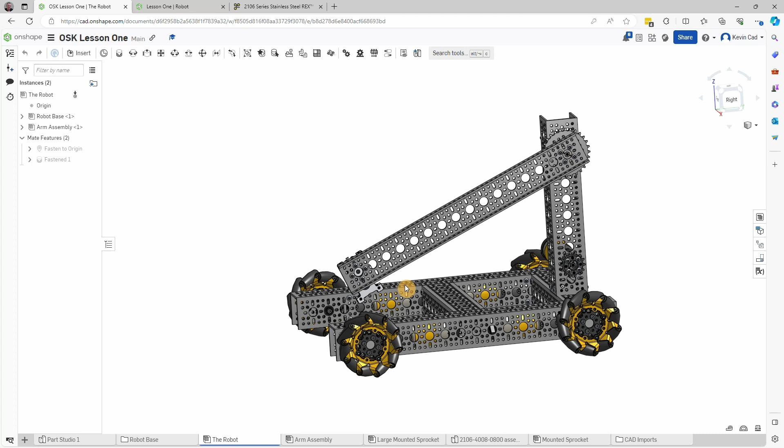You've seen how to assemble things, you've seen how mates work, you've seen some of the specialized mates—the ones that drive things. You've learned about screws, you've seen a whole bunch of different ways of looking at things and navigating around stuff, making things transparent. And this is actually a robot frame that is being used in a contest.

Next up, we're going to start doing part studios. That'll involve doing some drawings, extruding parts, and making things that you'd be able to 3D print or otherwise make custom parts out of.